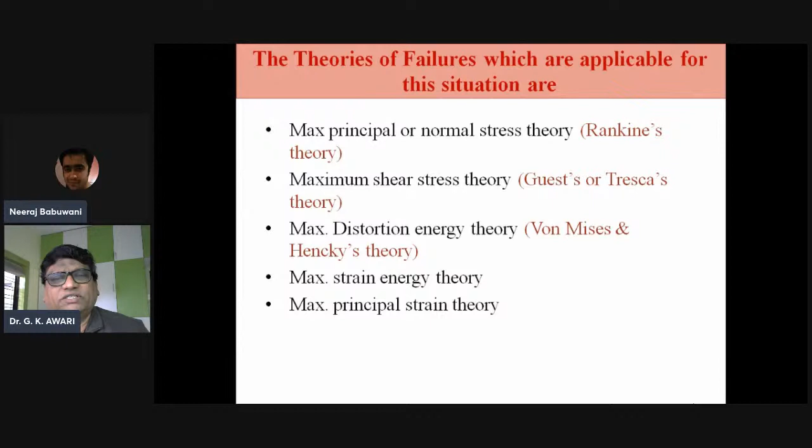Ductile material - you know there are properties like ductility, the ductile material and the brittle material, and you are already aware of the definitions of ductility, ductile material and brittle material. Ductile materials usually fail by yielding, and hence the limiting strength is the yield strength of the material as determined from the simple tension test, which is assumed the same in compression.

This means ductile materials usually fail by yielding and their limiting strength is nothing but the yield strength of the material, calculated by the simple tension test and assumed to be the same in compression. For brittle material, the limiting strength is the ultimate tensile strength in tension or compression. So the difference is: in ductile material, the yield strength is the limiting strength, while in brittle material, the ultimate tensile strength in tension or compression is the limiting value.

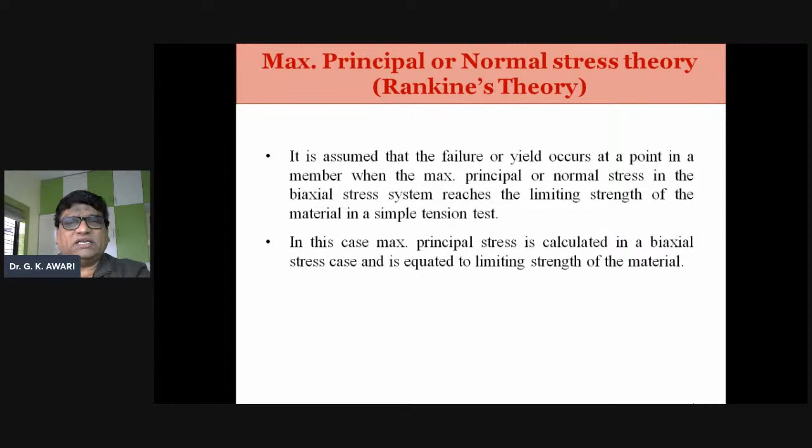Then the maximum principal stress theory, or the normal stress theory, that is Rankine's theory. It is assumed that failure or yield occurs at a point in a member when the maximum principal or normal stress in the biaxial stress system reaches the limiting strength of the material in a simple tension test. So the maximum principal stress is calculated in a biaxial stress case and is equated to the limiting strength of the material.

So maximum principal stress, that is sigma 1, is equal to sigma x plus sigma y divided by 2, plus square root of sigma x minus sigma y divided by 2 whole square plus tau square xy.

So look at this figure, the rectangular cross section is being shown. This is sigma x and tau xy, and in the y direction, sigma y. So this is the maximum principal stress.

So maximum principal stress, that is sigma x plus sigma y divided by 2, plus square root of sigma x minus sigma y divided by 2 whole square plus tau square xy. And minimum principal stress, that is sigma 2, is equal to sigma x plus sigma y divided by 2, minus square root of sigma x minus sigma y divided by 2 whole square plus tau square xy.

So for ductile material, sigma 1 should not exceed SYT divided by FOS, the factor of safety, in tension. For brittle material, sigma 1 should not exceed SUT divided by FOS in tension. So this theory is basically applicable for brittle materials, which are relatively stronger in shear, and not applicable to ductile materials, which are relatively weak in shear.

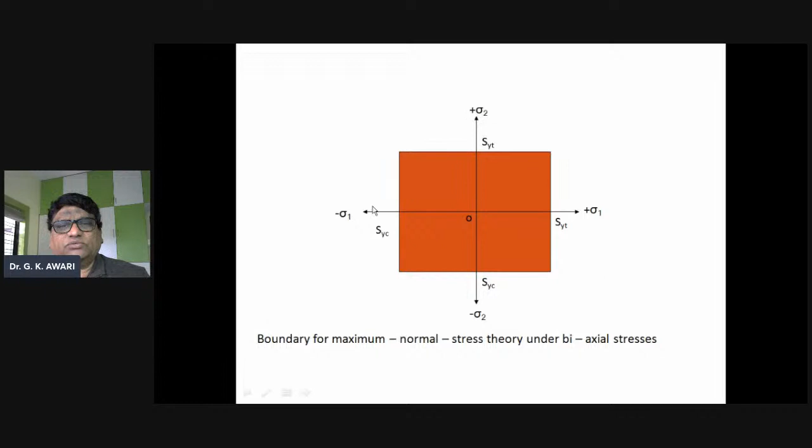The maximum shear stress theory, that is Guest's or Tresca's theory: the failure or yielding is assumed to take place at a point in a member where the maximum shear stress in a biaxial stress system reaches a value equal to the shear strength of the material obtained from a simple tension test.

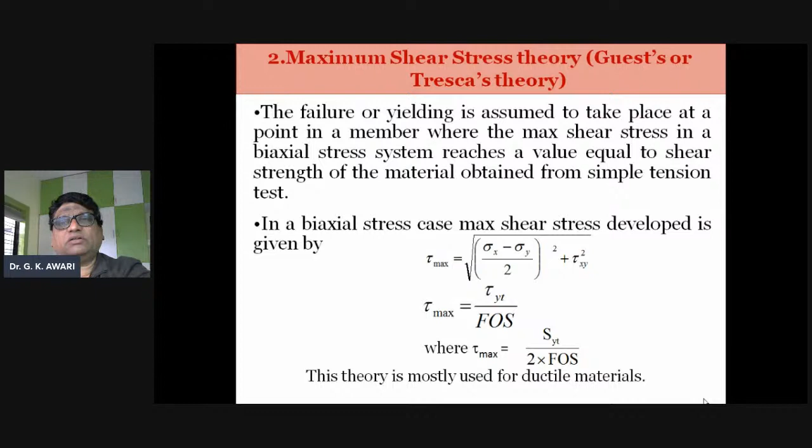In a biaxial stress case, the maximum shear stress developed is given by tau max is equal to square root of sigma x minus sigma y divided by 2 whole square plus tau square xy. Here tau max is equal to tau yt divided by factor of safety, FOS, where tau max is equal to SYT divided by 2 times FOS. So this theory is mostly used for ductile material. Yes, maximum shear stress theory, or Guest or Tresca theory, is used for ductile material.

According to the maximum shear stress theory, tau max is equal to SYT divided by 2, and also tau max is equal to maximum direct stress minus minimum direct stress divided by 2. So assuming sigma 1 is greater than sigma 2, sigma 2 is greater than sigma 3, and sigma 3 is equal to 0. So case 1, that is the first quadrant, sigma 1 and sigma 2 are positive. So tau max is equal to sigma 1 minus sigma 3 divided by 2, that is sigma 1 plus 0 divided by 2, which is equal to sigma 1 divided by 2, equal to SYT divided by 2. That is, sigma 1 is equal to SYT.

Case 4, fourth quadrant, sigma 1 is positive and sigma 2 is negative. Then tau max is equal to sigma 1 minus sigma 2 divided by 2, equal to SYT divided by 2. So second quadrant, that is sigma 1 is negative and sigma 2 is positive, then tau max is equal to sigma 2 minus sigma 1, in bracket, divided by 2. So finally it comes out to be sigma 2 plus sigma 1 divided by 2.

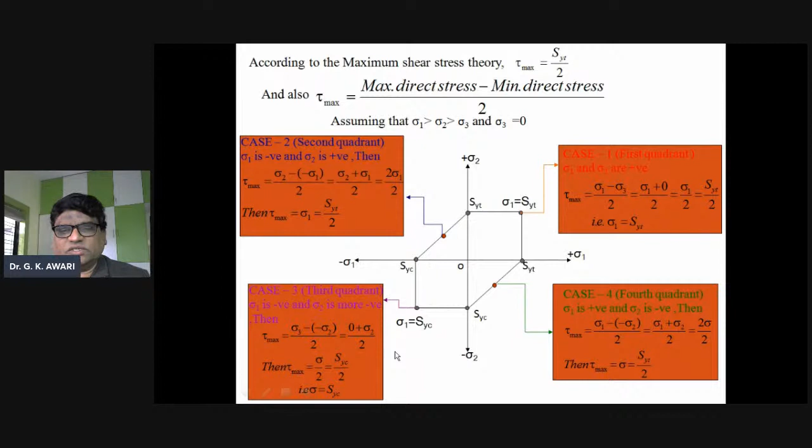So 2 sigma 1 divided by 2, and tau max is equal to sigma 1 is equal to SYT by 2. For case 3, in the third quadrant, sigma 1 is negative and sigma 2 is more negative. Here, tau max is equal to sigma 3 minus minus sigma 2 divided by 2, equal to 0, plus sigma 2 divided by 2. Tau max is equal to sigma by 2, equal to SYC divided by 2, so sigma is equal to SYC. This is the maximum distortion energy theory, also called the von Mises and Hencky's theory.

In this theory, it is assumed that failure or yielding occurs at a point in the member where the distortion strain energy, also called shear strain energy per unit volume in a biaxial stress system, reaches the limiting distortion energy, that is the distortion energy at yield point per unit volume as determined from a simple tension test. So maximum distortion energy is the difference between the total strain energy and the strain energy due to uniform stress. This is the maximum distortion energy theory, von Mises and Hencky's theory.

Look at this one. Here, for an element with triaxial stresses, we have the stress component due to distortion of the element, and stress components due to change of volume: sigma 3, sigma 2, sigma 1, and sigma 3d, sigma 2d, sigma 1d.

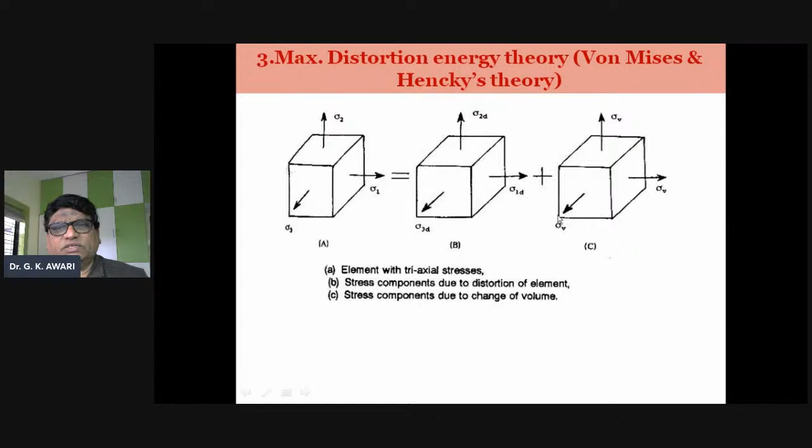Then the maximum distortion energy theory, that is the criteria of failure for the distortion energy theory, is expressed as SYT is equal to square root of 1 by 2 times bracket sigma 1 minus sigma 2 whole square plus sigma 2 minus sigma 3 whole square plus sigma 3 minus sigma 1 whole square.

Considering the factor of safety, SYT divided by FOS is equal to square root of 1 by 2 times sigma 1 minus sigma 2 whole square plus sigma 2 minus sigma 3 whole square plus sigma 3 minus sigma 1 whole square. For biaxial stresses, sigma 3 is equal to 0, so SYT divided by factor of safety is equal to square root of sigma 1 square plus sigma 2 square minus sigma 1 sigma 2. This is the maximum distortion energy theory, the von Mises and Hencky's theory.

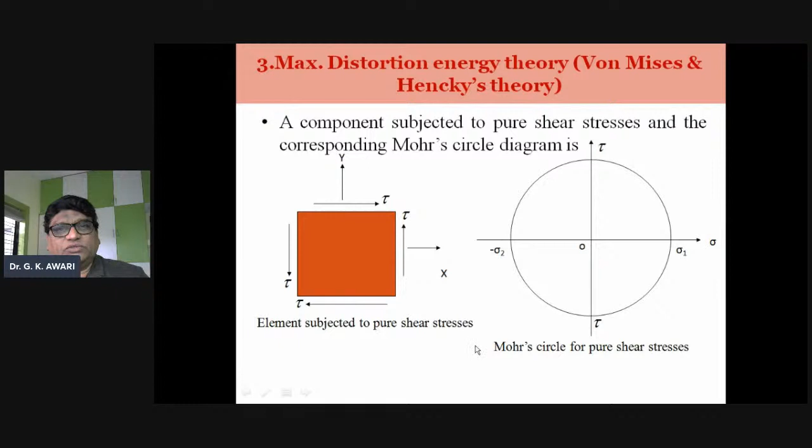A component subjected to pure shear stresses and the corresponding Mohr circle diagram is shown here. This is the Mohr circle diagram for pure shear stress. You can see tau placed here, sigma 1 on the x axis, and minus sigma 2 on the x axis. This is an element subjected to pure shear stresses. From the figure, we can see that sigma 1 is equal to minus sigma 2, which is equal to tau, and sigma 3 is equal to 0.

Substituting the values in the equation, SYT divided by FOS is equal to square root of sigma 1 square plus sigma 2 square minus sigma 1 into sigma 2. So we get SYT is equal to square root of 3 times tau. Replacing tau by SSY, we get SSY is equal to SYT divided by root 3, which is equal to 0.577 SYT.

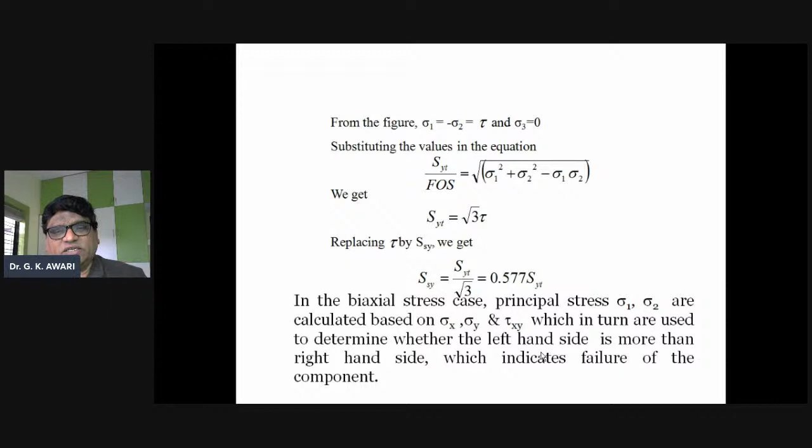In the biaxial stress case, principal stresses sigma 1 and sigma 2 are calculated based on sigma x, sigma y, and tau xy, which in turn are used to determine whether the left hand side is more than the right hand side, which indicates failure of the component. So these are the four cases being presented here.

Case number one: sigma 1 and sigma 2 are both positive and equal to sigma. Then SYT divided by FOS is equal to square root of sigma 1 square plus sigma 2 square minus sigma 1 into sigma 2, where sigma is equal to SYT divided by FOS, the factor of safety.

In the second case, sigma 1 is negative and sigma 2 is positive, equal to sigma. Then SYT divided by FOS comes out to be square root of sigma 1 square plus sigma 2 square minus sigma 1 sigma 2, which is equal to square root of sigma 1 square plus sigma 2 square plus sigma 1 sigma 2. So SYT divided by FOS is equal to square root of 3 sigma square, which is root 3 times sigma. So sigma is equal to 0.577 SYT divided by FOS.

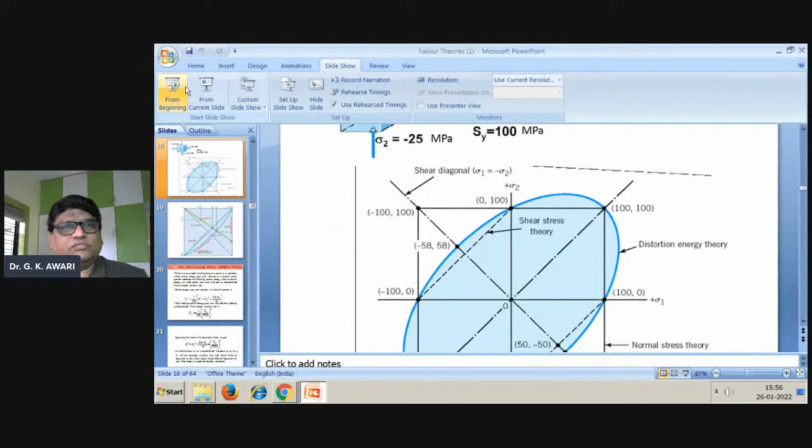So this is nothing but the shear stress theory. This is nothing but the normal stress theory. And the boundary, you can see that shear stress theory is shown in the dotted line. So the load point, load line - this is the load line, this is the shear diagonal, maximum shear stress, maximum distortion energy theory, maximum normal stress theory.

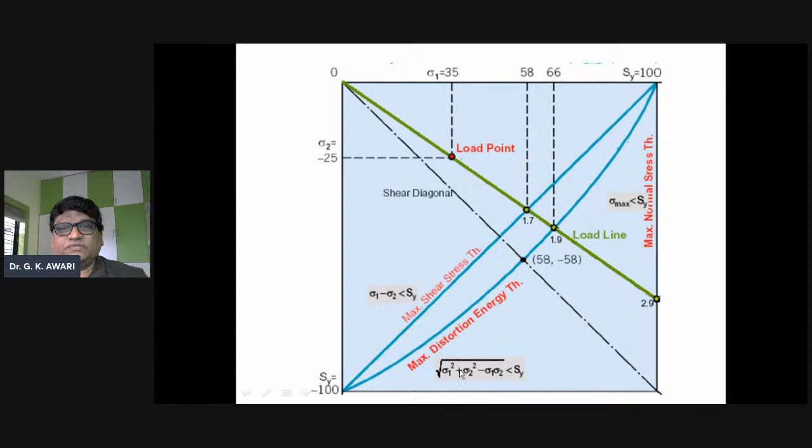So square root of sigma 1 square plus sigma 2 square minus sigma 1 sigma 2, less than or equal to SY. Then maximum strain energy theory, or the Haigh's theory.

So failure is assumed to take place at a point in a member where strain energy per unit volume in a biaxial stress system reaches the limiting strain energy, that is strain energy at yield point per unit volume as compared from a single simple tension test. So strain energy per unit of volume in a biaxial system is basically given by an equation...

u1 is equal to 1 by 2E into bracket sigma 1 square plus sigma 2 square minus 2 sigma 1 sigma 2 divided by m. The limiting strain energy per unit of volume for yielding, determined from the simple tension test, that is u2 is equal to 1 by 2E into bracket SYT divided by FOS whole square. So equating the above two equations, we get sigma 1 square plus sigma 2 square minus 2 times sigma 1 into sigma 2 divided by m is equal to SYT divided by FS whole square.

In the biaxial case, sigma 1 and sigma 2 are calculated based on sigma x, sigma y, and tau xy. It will be checked whether the left hand side of the equation is less than the right hand side of the equation or not. And this theory is used for ductile material.

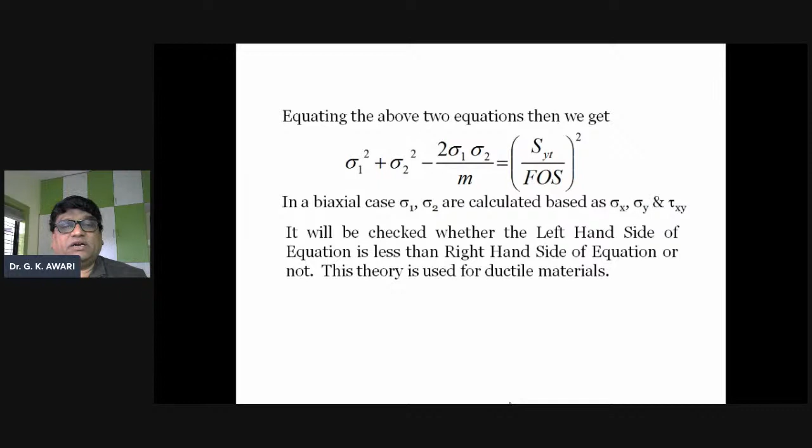Then the fifth topic in these failure theories, that is maximum principal strain theory, or Saint Venant's theory. It is assumed that failure or yielding occurs at a point in a member where the maximum principal normal strain in a biaxial stress exceeds the limiting value of strain at yield point as obtained by the simple tension test.

So in a biaxial stress case, Emax is equal to sigma 1 divided by E minus sigma 2 divided by mE, which is equal to SYT divided by factor of safety into E. One can calculate sigma 1 and sigma 2 given the sigma x, sigma y, and tau xy values, and we need to check whether the material fails or not. So this theory is not used in general as a reliable result, as reliable results could not be obtained in a variety of materials. So maximum principal stress theory, strain theory - that is Saint Venant's theory - may be considered to check whether the material fails or not, but this theory is not reliable.

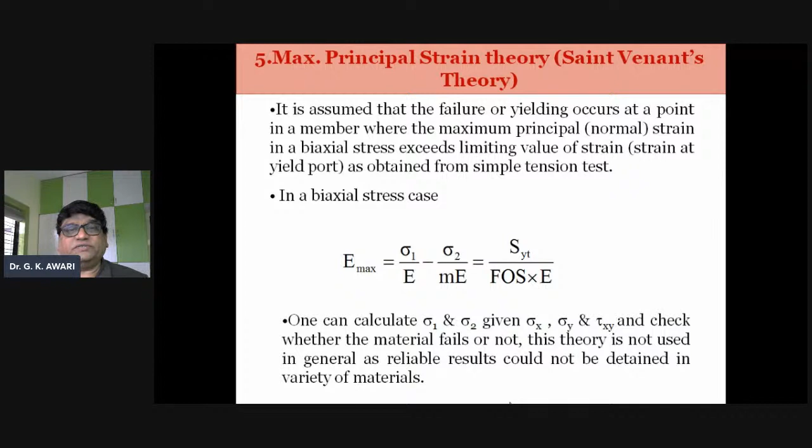Now, an example of these failure theories: the load on a bolt consists of an axial pull of 10 kilonewton together with a transverse shear force of 5 kilonewton. Find the diameter of the bolt required according to the maximum principal stress theory, maximum shear stress theory, maximum principal strain theory, and maximum strain energy theory or maximum distortion energy theory. Permissible tensile stress at the elastic limit is equal to 100 MPa and Poisson's ratio is 0.3.

This example is given where the load on the bolt consists of an axial pull of 10 kilonewton together with a transverse shear force of 5 kilonewton, and we have to find the diameter of the bolt required. What should be the diameter according to the maximum principal stress theory, maximum shear stress theory, maximum principal strain theory, maximum strain energy theory, and maximum distortion energy theory? The permissible stress at the elastic limit is equal to 100 MPa and Poisson's ratio is 0.3.

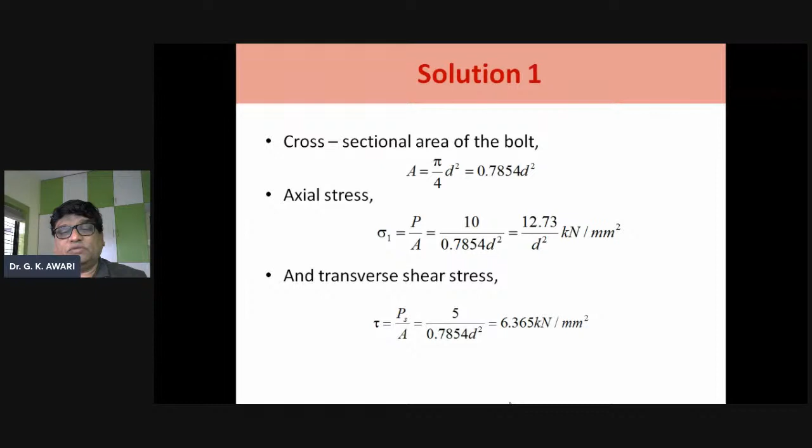The cross-sectional area of the bolt can be calculated as A equals pi by 4 d square, which comes out to be 0.7854 d square. Then axial stress sigma 1 equals P by A, so 10 divided by 0.7854 d square equals 12.73 divided by d square kilonewton per mm square. The transverse shear stress tau equals PS divided by A, equals 5 divided by 0.7854 d square, hence tau equals 6.36 kilonewton per mm square.

According to the maximum principal stress theory, the maximum principal stress sigma 1 equals sigma x plus sigma y divided by 2 plus square root of sigma x minus sigma y divided by 2 whole square plus tau square xy. So sigma 1 equals 12.73 divided by d square plus square root of 12.73 divided by 2d square whole square plus 6.365 divided by d square whole square, and finally sigma 1 equals 15365 divided by d square newton per mm square.

According to the maximum principal stress theory, SYT equals sigma 1. So 100 equals 15365 divided by d square, and the diameter of the bolt comes out to be 12.4 mm.

Then according to the maximum shear stress theory, the equation proposed is tau max equals square root of sigma x minus sigma y divided by 2 whole square plus tau square xy. So tau max equals 12.73 divided by d square plus 6.365 divided by d square whole square, giving tau max equals 9 divided by d square kilonewton per mm square, equal to 9000 divided by d square newton per mm square.

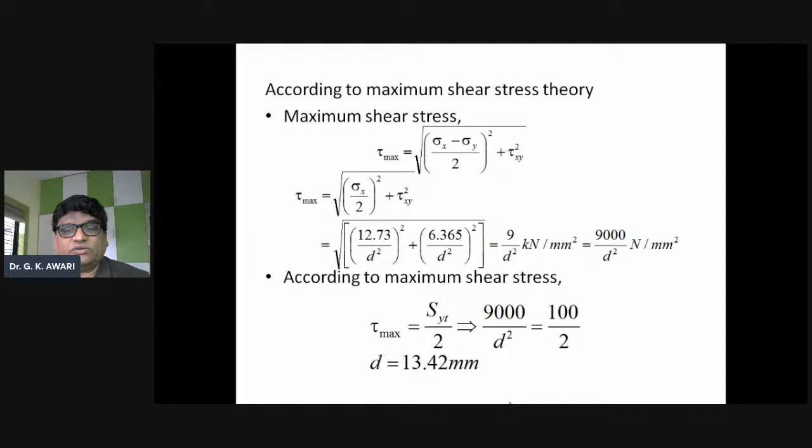According to the maximum shear stress theory, tau max equals SYT divided by 2, so 9000 divided by d square equals 100 divided by 2. So d equals 13.42 mm.

Then according to the maximum principal strain theory, the maximum principal stress is given by sigma 1 equals sigma x plus sigma y divided by 2 plus square root of sigma x minus sigma y divided by 2 whole square plus tau square xy, giving 15365 divided by d square. The other principal stress sigma 2 equals sigma x plus sigma y divided by 2 minus square root of sigma x minus sigma y divided by 2 whole square plus tau square xy.

So sigma 2 is given by sigma x divided by 2 minus square root of sigma x divided by 2 whole square plus tau square xy. It comes out to be 12.73 divided by d square minus square root of 12.73 divided by 2d square whole square plus 6.365 divided by d square whole square, so sigma 2 equals minus 2635 divided by d square newton per mm square.

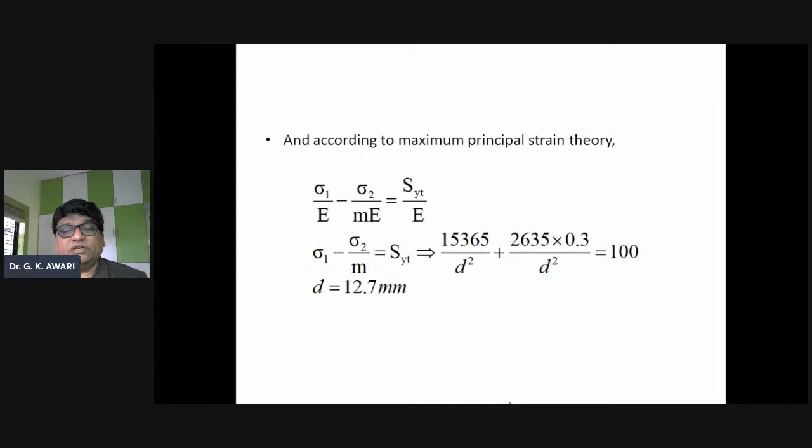According to the maximum principal strain theory, sigma 1 minus sigma 2 divided by m equals SYT divided by E, where sigma 1 minus sigma 2 by m equals SYT, equal to 15365 divided by d square plus 2635 into 0.3 divided by d square equals 100. So the diameter comes out to be 12.7 mm.

Then according to the maximum strain energy theory, sigma 1 square plus sigma 2 square minus 2 sigma 1 sigma 2 divided by m equals syt square. So these are the equations used to find the diameter, which is 12.78 mm.

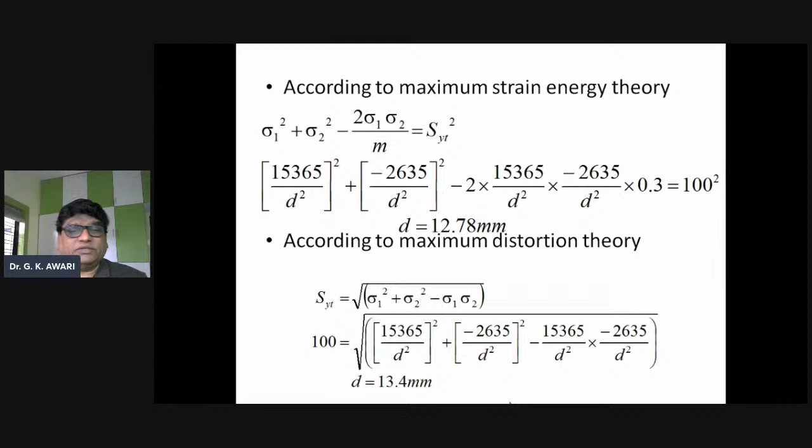Average the value according to the maximum distortion theory. So SYT is equal to square root of sigma 1 square plus sigma 2 square minus sigma 1 sigma 2. Keeping the value of 100 as SYT, 100 is equal to square root of 15365 divided by d square, minus 2635 divided by d square, minus 15365 divided by d square minus 1, minus 2635 divided by d square. So d is equal to 13.4 mm.

So now we will see the fatigue strength and analysis.

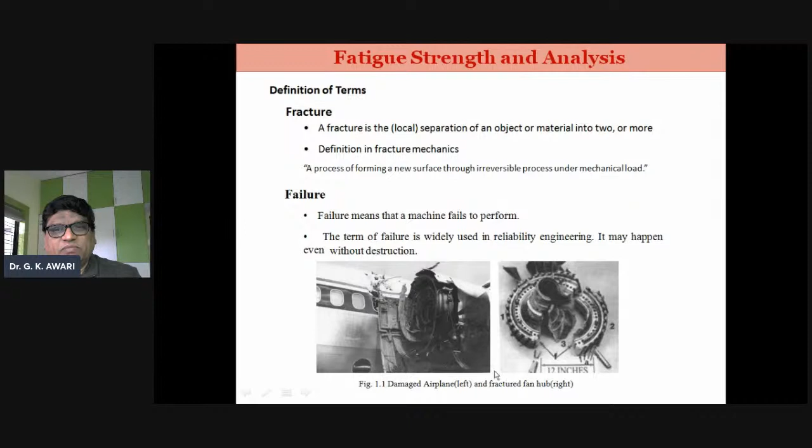Then classification of fracture type: ductile fracture, that is extensive plastic deformation takes place before the fracture. Relatively slow and stable crack propagation, in that cracks are in equilibrium at each point. Propagation stops when a load is removed, and an extra load must be applied for further crack propagation.

So in a pipe: ductile fracture, left, one piece and a large deformation; brittle fracture, right, many pieces from small deformation. Crack propagation is stable, and the cracks are in equilibrium at each point. Propagation stops when a load is removed, and an extra load must be applied for further crack propagation.

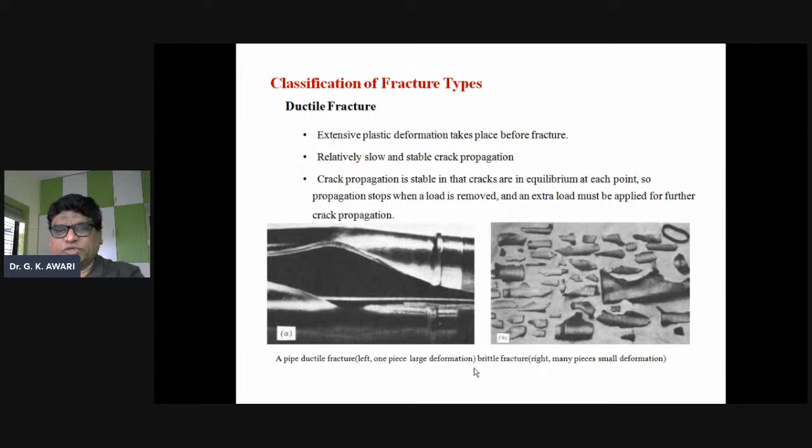Definition in ASTM, American Society for Testing and Material: it is the process of progressively localized permanent structural change occurring in a material subjected to conditions that produce fluctuating stresses and strains at some point or points, and which may culminate in cracks and complete fracture at a sufficient number of fluctuations. So fatigue fracture is the destruction as a result of repeated loading and unloading.

Fatigue fracture generalization: a material receives external or internal repeated loading, cyclic loading, changes in local organization due to the repeated load eventually lead to cracks or fracture process.

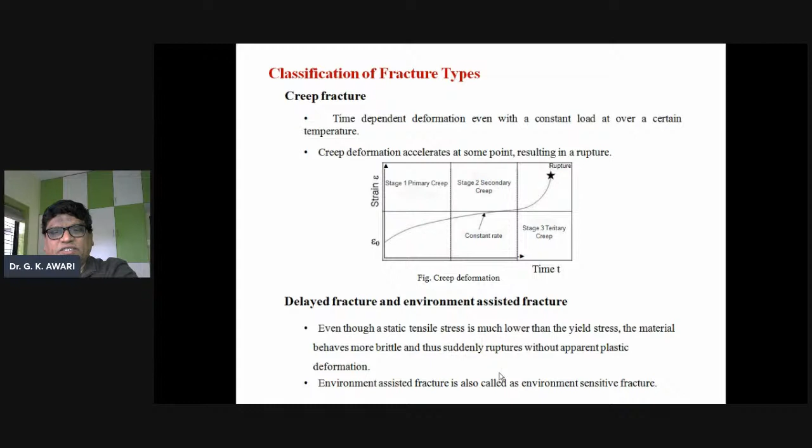Then the fracture types and basically the material strength.

What do you mean by the strength of material? Strength of the material is considered in two cases: with and without flaws or cracks. Basic strength is normally without flaws.

Fatigue strength is very important in terms of the strength of material, and fatigue strength is one of the important parameters in mechanical design.

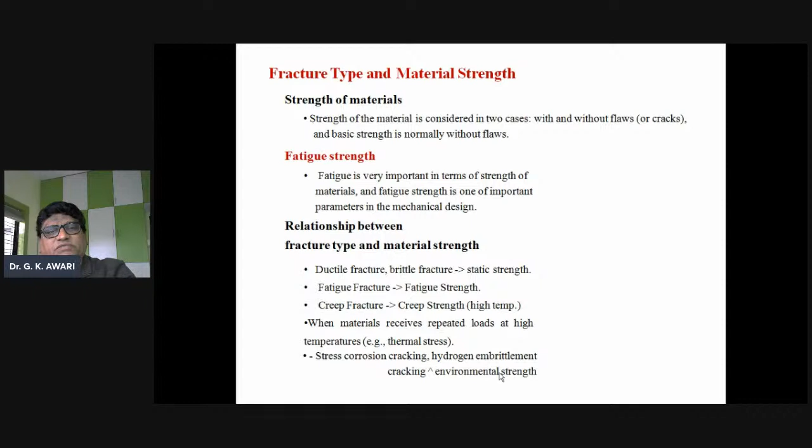Relationship between the fracture type and material strength: ductile fracture, brittle fracture from static strength; fatigue fracture from fatigue strength; creep fracture from creep strength or high temperature, when material receives repeated loads at high temperature, for example thermal stresses; and stress corrosion cracking, hydrogen embrittlement cracking, and environmental strength. This is the relationship between fracture type and material strength.

Characteristics of fatigue fracture: cyclic loading. Fatigue occurs as a result of repeated loading and unloading. All machines and structures get cyclic loading in nature, so most fractures result from fatigue only. Although cyclic stress range is smaller than static fracture stress or yield stress, fatigue fracture occurs.

Fatigue limit or endurance limit are expressions used to describe a property of material: the amplitude of cyclic stress that can be applied to the material without causing fatigue failure.

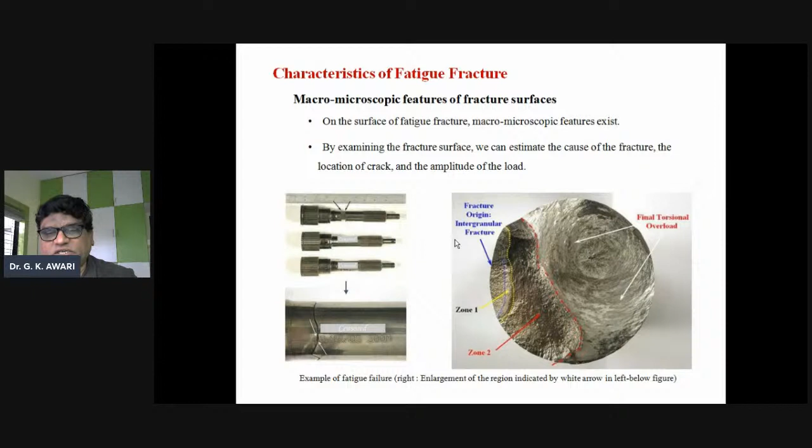SN diagram: you can see here the number of stress cycles and fatigue strength, that is KPSI. Low cycle here, and high cycle here - finite life, infinite life.

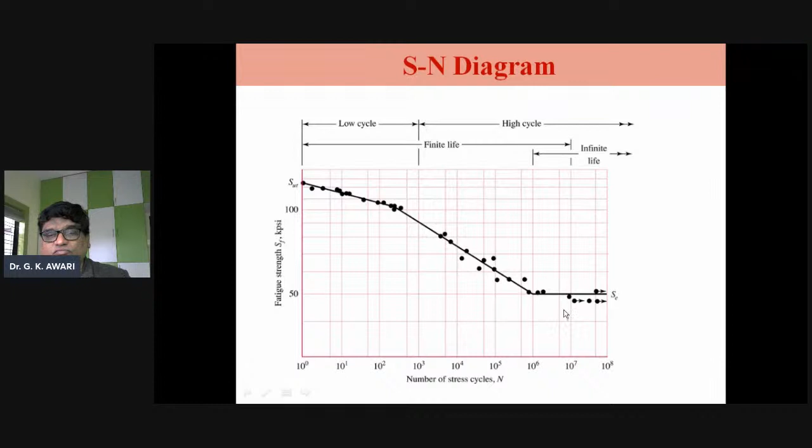Stress levels below Se predict infinite life. 10 to the power of 3, 10 to the 2, 10 to the power of 6 cycles is finite cycle. Below 10 to the power of 3 is low cycle, that is quasi-static, and yielding usually occurs before fatigue. This is the SN diagram for steel.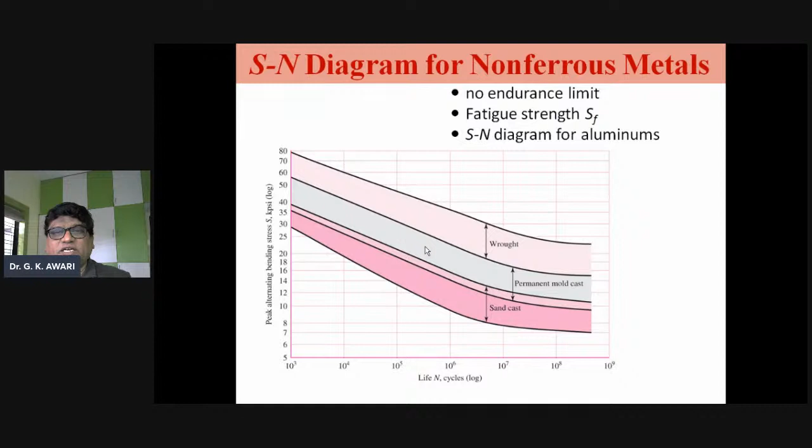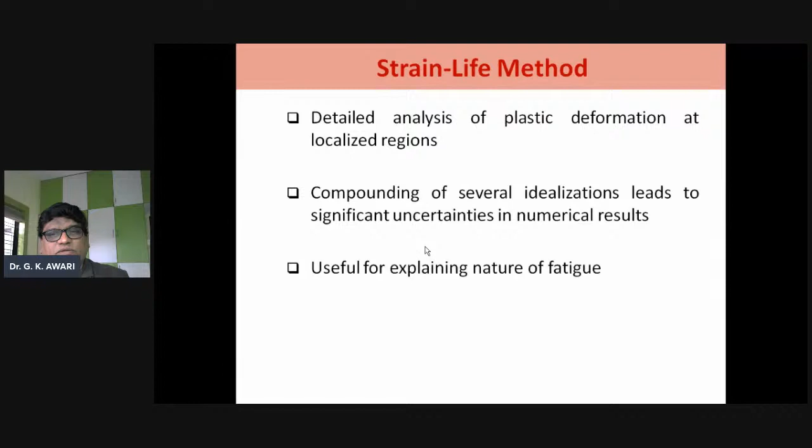The detailed analysis of plastic deformation at a localized region is the strain-life method. Compounding of several idealizations leads to significant uncertainties in numerical results, but it's useful for explaining the nature of fatigue. Then the strain-life method: fatigue failure begins at a local discontinuity.

It begins at the local discontinuity. When stress at the discontinuity exceeds the elastic limit, plastic strain occurs. The cyclic plastic strain can change the elastic limit, leading to fatigue.

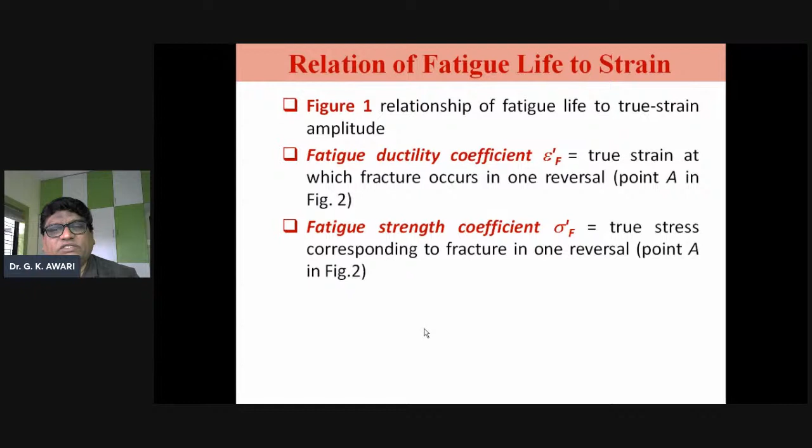Relationship of fatigue life to strain: figure one shows the relationship of fatigue life to the true strain amplitude. Fatigue ductility coefficient is the true strain at which fracture occurs in one reversal, point A in figure 2. Fatigue strength coefficient is the true stress corresponding to fracture in one reversal, point A in figure 2.

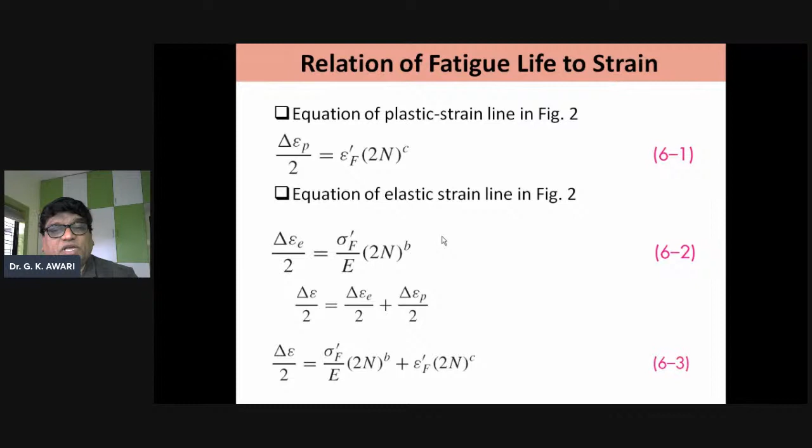The relationship of fatigue life to strain: equation of the plastic strain line is delta epsilon P divided by 2 equals epsilon F prime times 2N to the power c. Equation of the elastic strain line is delta epsilon E divided by 2 equals sigma F prime divided by E times 2N to the power b, plus epsilon F prime times 2N to the power c.

The relationship of fatigue life to strain: delta epsilon E divided by 2 equals sigma F prime divided by E times 2N to the power b.

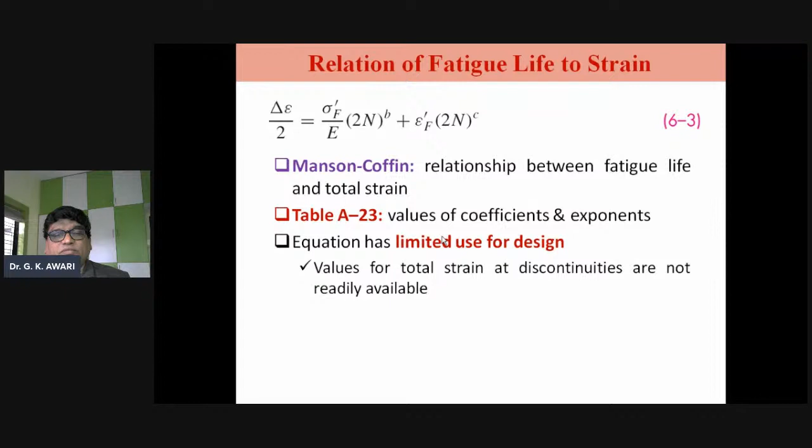The Manson-Coffin relationship relates fatigue life to total strain. Table A-23 gives values of coefficient and exponent, but the equation has limited use for design since values of total strain at discontinuities are not readily available.

For the endurance limit, we can see the plot for three materials: carbon steels, alloy steels, and wrought iron, plotted with respect to tensile strength SUT against the endurance limit.

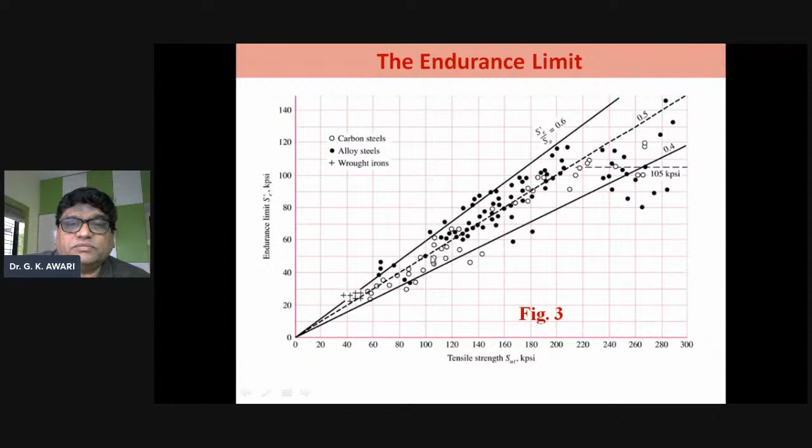A simplified estimate of endurance limit for steels, for the rotating beam specification specimen, is S'e equals 0.5 SUT, which gives the endurance limit.

The simplified relationship is: SUT should be lesser than or equal to 200 kpsi (1400 megapascal); for SUT greater than 200 kpsi and 1400 MPa, S'e equals 100 kpsi, and 700 megapascal for SUT greater than 1400 MPa.

Fatigue strength for design requires an approximation of the idealized SN diagram. To estimate fatigue strength at 10 to the power of 3 cycles, start with equation 6.2.

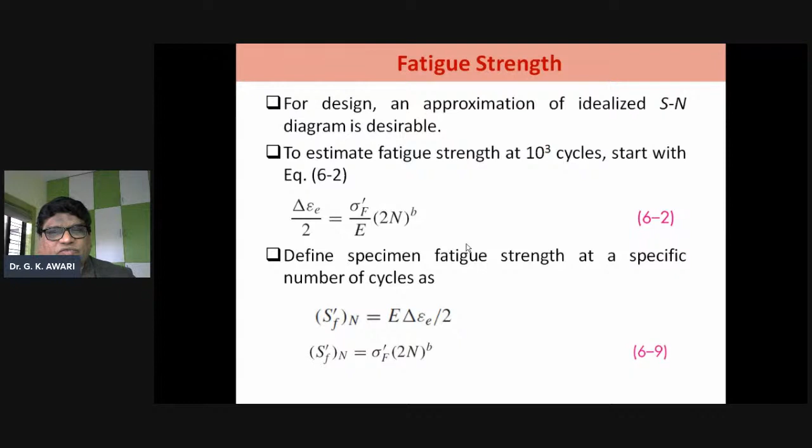At 10 to the power of 3 cycles, F is equal to a fraction of SUT. So the fraction of SUT is equal to SF at 10 to the power of 3.

Here sigma F is equal to SUT plus 50 kpsi, or sigma F is equal to SUT plus 345 MPa.

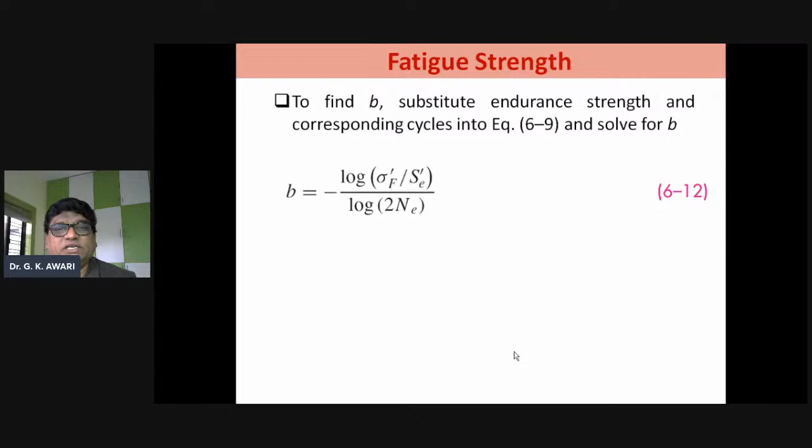To find B, substitute the endurance strength and corresponding cycles into equation 6.9 and solve for B: B is equal to minus log of sigma F divided by SE, divided by log of 2n.

So SFN is equal to sigma F times 2n to the power of B. Then substitute equation 6.11 and 6.12 into equations 6.9 and 6.10, shown here, to obtain the expression for SF and F.

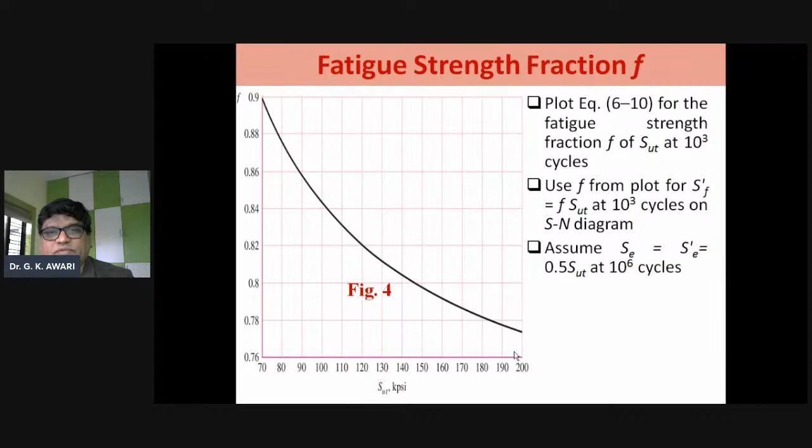So use F from the plot, that is, SF equals F of SUT at 10 to the power of 3 cycles on the SN diagram, and assume SE equals 0.5 SUT at 10 to the power of 6 cycles.

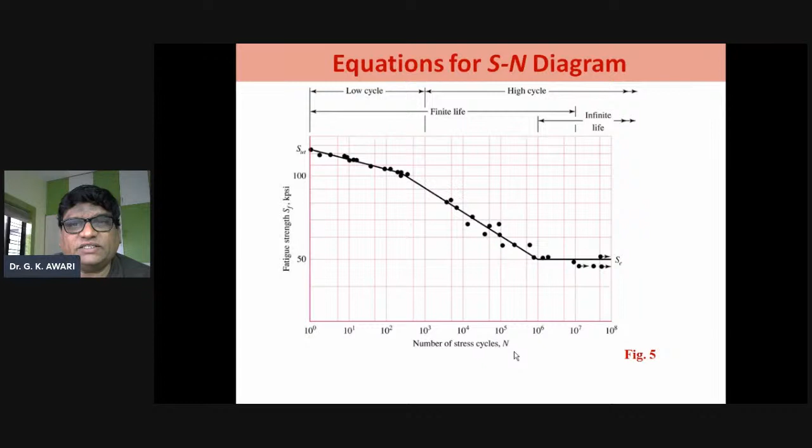So equations for the SN diagram covering fatigue strength versus number of cycles, low cycle, high cycle, finite life, and infinite life are given. Write equations for the SN line starting from 10 to the power of 3.

So for the equations of the SN diagram, write the equation for the SN line from 10 to the power of 3 to 10 to the power of 6 cycles.

Using two known points: at n equals 10 to the power of 3 cycles, SF equals F of SUT, and at n equals 10 to the power of 6 cycles, SF equals SE.

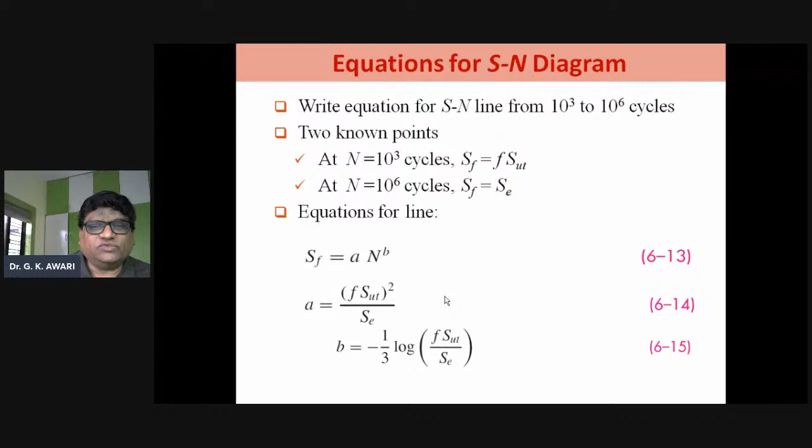The equation for the line is SF equals a times n to the power of b, where a equals F of SUT squared divided by SE, and b equals minus one-third log of F SUT divided by SE.

If a completely reversed stress sigma reversed is given, setting SF equal to sigma reversed and solving for n gives n equals sigma reversed divided by A, raised to the power of 1 by B.

So the typical SN diagram is only applicable for completely reversed stresses. For other stress states, a completely reversed stress with the same life expectancy must be used on the SN diagram.

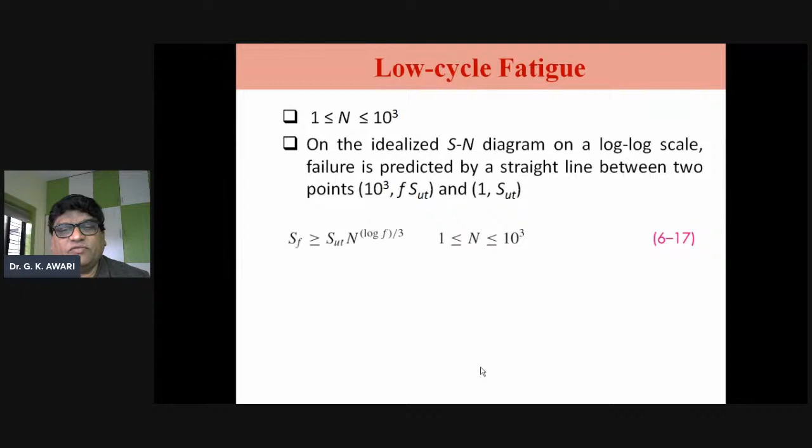Low cycle fatigue occurs when n is greater than 1 and less than 10 to the power of 3. On the idealized diagram using a log scale, failure is predicted by a straight line between two points: 10 to the power of 3 comma F of SUT, and 1 comma SUT. So SF equals SUT times n to the power of log of F divided by 3, where n lies between 1 and 10 to the power of 3.

So, given a 1050 HR steel, estimate the rotating beam endurance limit at 10 to the power of 6 cycles.

The endurance strength of a polished rotating beam specimen corresponding to 10 to the power of 4 cycles to failure, and the expected life of a polished rotating beam specimen under a completely reversed stress of 55 kpsi.

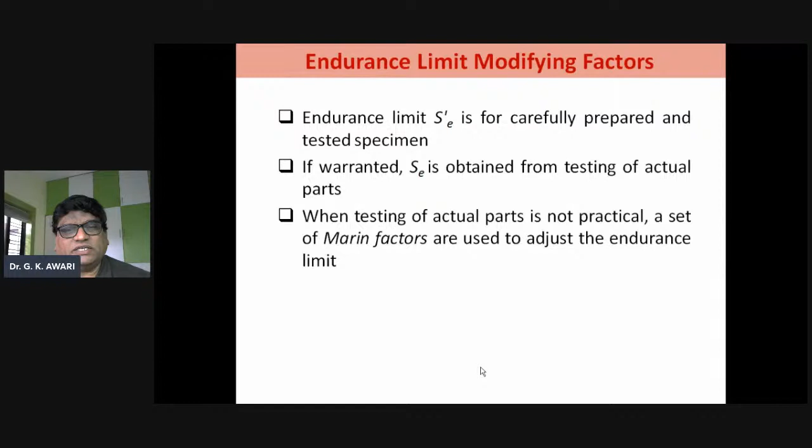So the endurance limit SE is for a carefully prepared and tested specimen. If warranted, SE is obtained from testing of the actual part. When testing of the actual part is not practicable, a set of Marin factors are used to adjust the endurance limit.

So these are some of the GATE questions based on the theories of failure. Match the correct pairs from the list. What is given: Hooke's law, Saint Venant's law, Kepler's law, Tresca's criteria, Coulomb's law, Griffith's law.

Planetary motion corresponds to Kepler's law, not Saint Venant's law, which is the maximum principal strain theory. Hooke's law is related to elasticity, Kepler's law is related to planetary motion, and Tresca's criteria is related to fracture.

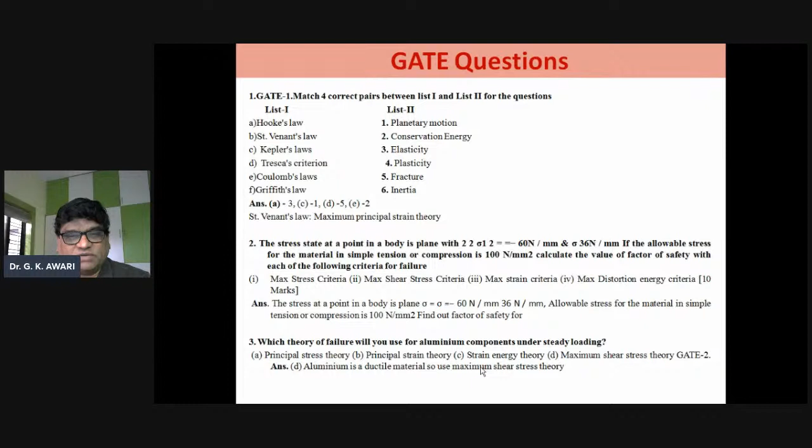Which theory of failure will you use for aluminum components under steady loading? Options are maximum principal stress theory, maximum principal strain theory, strain energy theory, or maximum shear stress theory. Since aluminum is a ductile material, we use the maximum shear stress theory.

Similarly, which of the following is the most conservative fatigue failure criteria? Soderberg criteria, modified Goodman criteria, ASME elliptic, or Gerber criteria? So Soderberg criteria is the most conservative fatigue fracture criteria.

The fatigue strength of a rod subjected to axial load is less than that of a rotating beam of the same dimensions subjected to a steady lateral force, because axial stiffness is less than the bending stiffness in the absence of centrifugal effects. What is the correct option? The number of discontinuities vulnerable to fatigue are more in the rod.

The process of shot peening increases the fatigue life of steel springs mainly because it results in surface hardening, increased stiffness, or metal changes? Actually, shot peening increases the fatigue life of steel springs mainly because it results in residual compression at the surface.

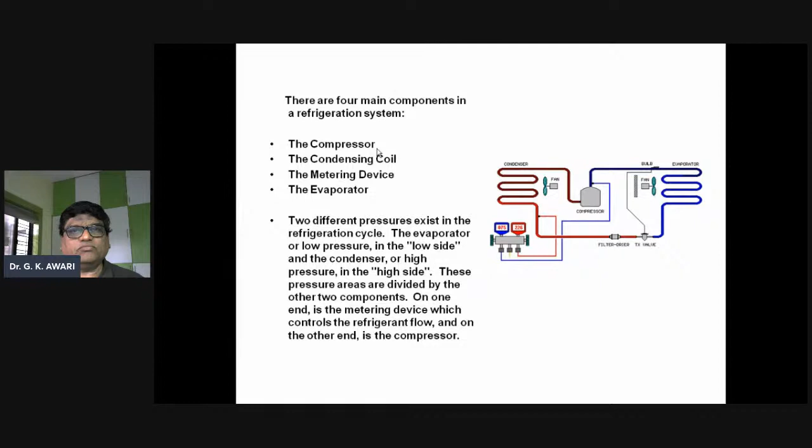Saturation temperature is defined as the temperature of a liquid, vapor, or solid, where if any heat is added or removed, a change of state takes place. This change of state transfers a large amount of energy if saturation pressure materials are sensitive to additions or removal of heat.

Water is an example of a low saturation property material; it can transfer a large amount of heat. Refrigerants use the same principle as ice. For any given pressure, refrigerant has a saturation temperature. If the pressure is low, the saturation temperature is low. If the pressure is high, the saturation temperature is also high.

Latent heat is the heat required to change a liquid into a gas, or the heat that can be removed from the gas. Latent heat must be removed from the gas to condense it into a liquid without any change in temperature. Heat is a form of energy that is transferred from one object to another by a difference in temperature.

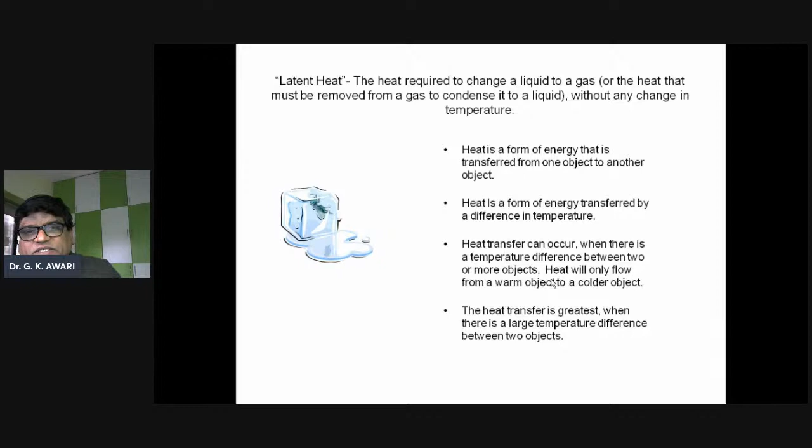Heat transfer can occur when there is a temperature difference between two or more objects. Heat will only flow from a warm object to a colder object. The heat transfer is greatest when there is a large temperature difference between the two objects.

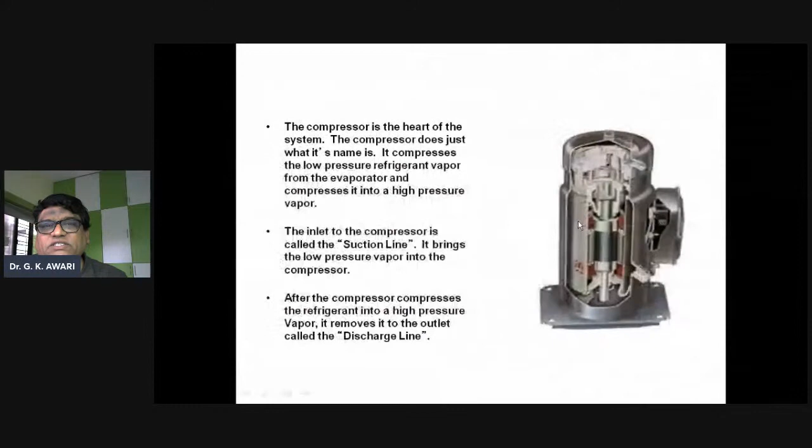There are four main components of the vapor compression cycle: the compressor, the condensing coil, the metering device, and the evaporator. Two different pressures exist in the refrigeration cycle: the evaporator or low pressure on the low side, and the condenser or high pressure on the high side.

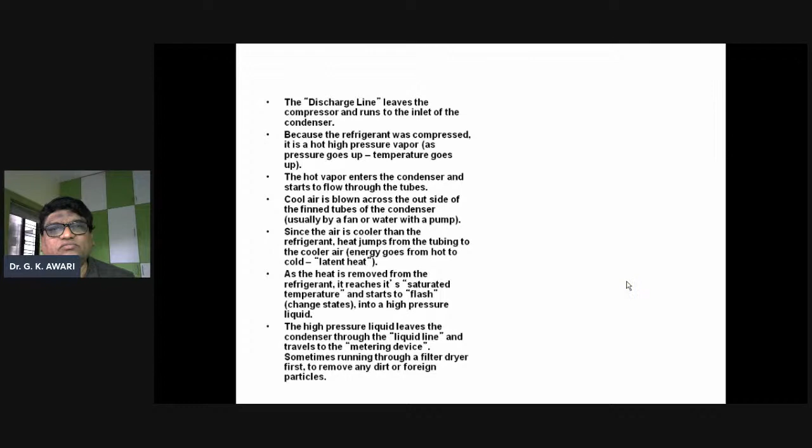The compressor is the heart of the system. The compressor does just what its name implies: it compresses the low pressure refrigerant vapor from the evaporator and compresses it into a high pressure vapor. This is the function of the compressor.

The inlet to the compressor is called the suction line. It brings the low pressure vapor into the compressor, and after the compressor compresses the refrigerant into high pressure vapor, it removes it to the outlet called the discharge line. The discharge line leaves the compressor and runs to the inlet of the condenser. This is the expansion valve, compressor, evaporator, and condenser.

Because the refrigerant was compressed, it is a high pressure vapor. As pressure goes up, temperature goes up. The hot vapor enters the condenser and starts to flow through the tube. Cool air is blown across the side of the fin tubes of a condenser, usually by a fan or water with a pump.

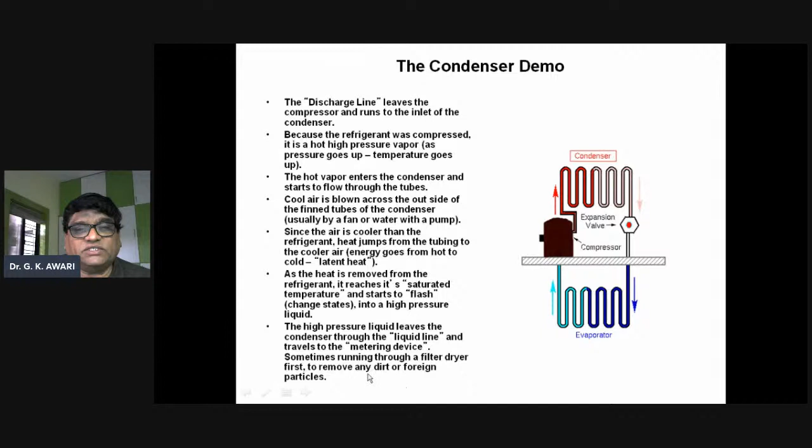As the latent heat is removed from the refrigerant, it reaches its saturated temperature and starts to flash, meaning it changes states into a high pressure liquid. The high pressure liquid leaves the condenser through the liquid line and travels to the metering device, sometimes running through a filter dryer first to remove any dirt or foreign particles.

Metering devices regulate how much liquid refrigerant enters the evaporator. It regulates the flow of the liquid refrigerant entering into the evaporator. Commonly used metering devices are small thin copper tubes, also called cap tubes, or thermally controlled diaphragm valves called TXVs, thermal expansion valves, and single opening orifices.

The metering device tries to maintain a preset temperature difference, or superheat, between the inlet and outlet openings of the evaporator. As the metering device regulates the amount of refrigerant going into the evaporator, the device lets small amounts of refrigerant out into the line and loses the high pressure behind it.

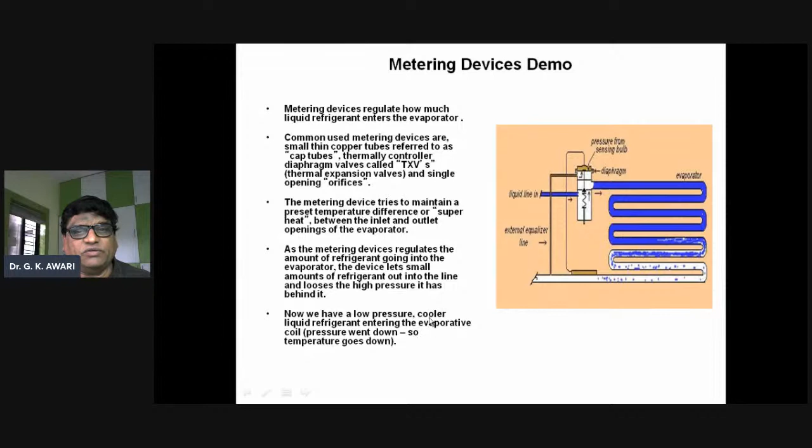Now we have a low pressure, cooler liquid refrigerant entering the evaporator coil. So pressure went down, so the temperature also goes down.

Now the thermal expansion valve. Look at the thermal expansion valve. It is a very common type of metering device, called a TX valve, or thermostatic expansion valve. This valve has the capability of controlling the refrigerant flow.

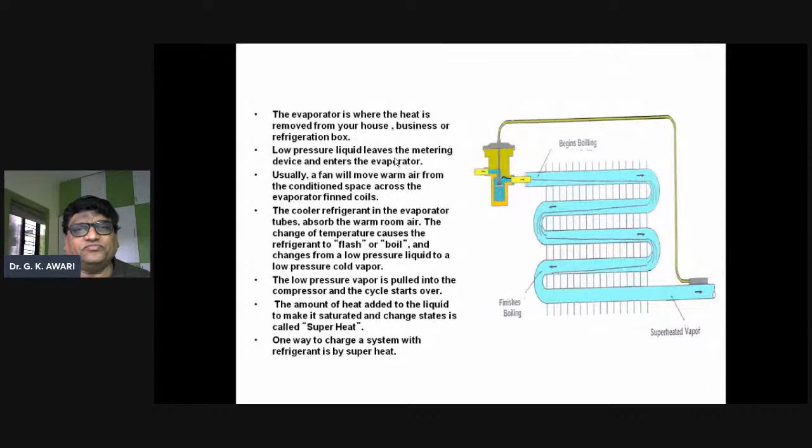If the load on the evaporator changes, the valve can respond to the change and increase or decrease the flow accordingly. The TXV has a sensing bulb attached to the outlet of the evaporator; the bulb senses the suction line temperature and sends a signal to the TXV, allowing it to adjust the flow rate.

This is important because if not all the refrigerant in the evaporator changes state into gas, there could be liquid refrigerant returning to the compressor. This can be fatal to the compressor.

Liquid cannot be compressed, and when a compressor tries to compress a liquid, mechanical failure can happen. The compressor can suffer mechanical damage to the valves and bearings, and this is called liquid slugging.

So normally TXVs, that is thermal expansion valves, are set to maintain 10 degrees of superheat. That means the gas returning to the compressor is at least 10 degrees away from the risk of having any liquid.

In the evaporator demo, you can see this is the part of the evaporator. Here is the superheated vapor, here it begins boiling, and here it finishes boiling. The evaporator is where heat is removed from your house, business, or refrigeration box.

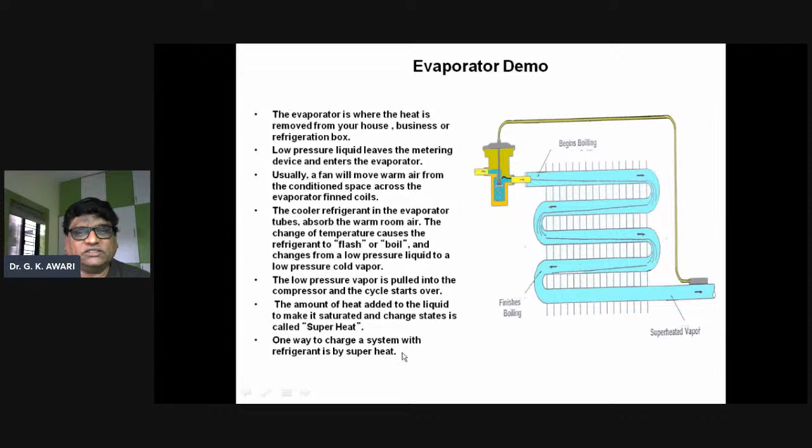The amount of heat added to the liquid to make it saturated and change states is called superheat. One way to charge a system with refrigerant is by superheat.

Now a review of the refrigeration cycle, how the refrigeration cycle works. It starts with the compressor. In the beginning, you have to start the compressor.

Then low pressure vapor refrigerant is compressed and discharged out of the compressor. The refrigerant at this point is at high temperature, high pressure, in the superheated region.

The high pressure refrigerant flows to the condenser through the discharge line. The condenser changes the high temperature vapor into a low temperature, high pressure liquid, and it leaves through the liquid line.

The high pressure refrigerant then flows through a filter dryer to the thermal expansion valve, which meters the correct amount of liquid refrigerant into the evaporator.

As the TXV meters the refrigerant, the high pressure liquid changes to a low pressure, low temperature saturated liquid vapor, and it enters the evaporator and changes to a low pressure dry vapor.

The low pressure dry vapor is then returned to the compressor through the suction line, and then the cycle starts over again. So this is the review of the simple vapor compression system.

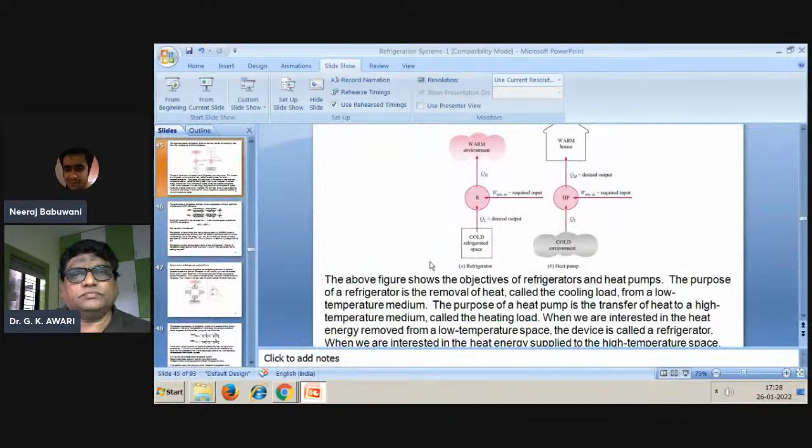The vapor compression refrigeration cycle is a common method.

So the vapor compression refrigeration cycle is a common method for transferring heat from a low temperature to a high temperature. This is the cold or refrigerator space, and by providing the required input, we take out the heat, and this heat is rejected to the warm environment.

This is the refrigerator and the heat pump: the cold environment is there, and the required input is provided so that heat is being pumped from the cold environment and then supplied to the warm house. The above two figures show the objectives of the refrigerator and the heat pump.

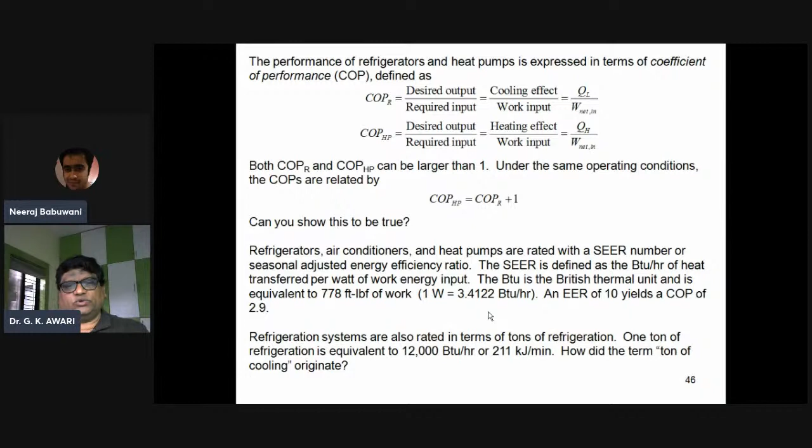How did the term ton of cooling originate? So the reverse Carnot refrigerator and basically the heat pump, in this case if we see here...

Recall that in the Carnot cycle, heat transfer takes place at a constant temperature. So if our interest is in the cooling load, the cycle is called the Carnot refrigerator. If our interest is in the heating load, the cycle is called the Carnot heat pump.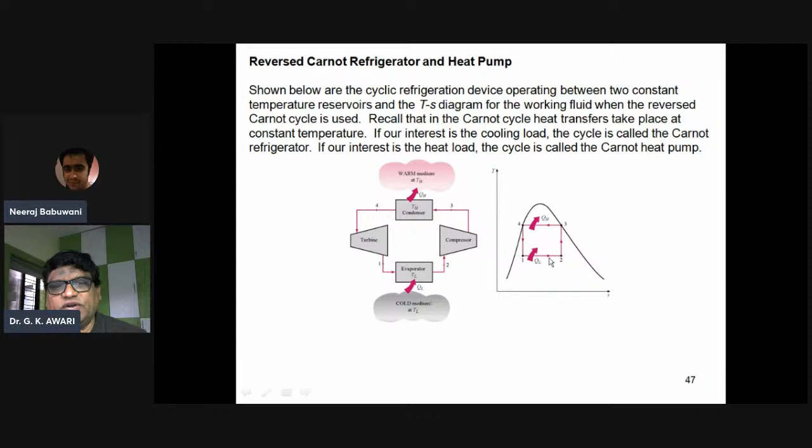is circulated into the evaporator, and again in the evaporator it absorbs heat from the space or substance to be cooled, and then becomes vapor again. These vapors again reach the compressor, and then further compression, condensation, expansion valve or capillary tube, and then evaporator. This process or cycle continues.

The standard of comparison for refrigeration cycles is the reverse Carnot cycle. A refrigerator or heat pump that operates on the reverse Carnot cycle is called a Carnot refrigerator or Carnot heat pump, and their COPs are calculated as COP refrigerator Carnot equals TL divided by TH minus TL, and COP of the heat pump Carnot equals TH divided by TH minus TL.

Notice that a turbine is used for the expansion process between the high and low temperature, while the work interactions for the cycle are not indicated on the figure. The work produced by the turbine helps supply some of the work required by the compressor from external sources.

Why not use the reverse Carnot refrigeration cycle? It is easier to compress vapor only than a liquid vapor mixture, and it is cheaper to have irreversible expansion through an expansion valve. So what problem results from using a turbine instead of an expansion valve?

This brings us to the vapor compression refrigeration cycle. It has four main components: evaporator, compressor, condenser, and the expansion or throttle valve. The most widely used refrigeration cycle is the simple vapor compression refrigeration cycle.

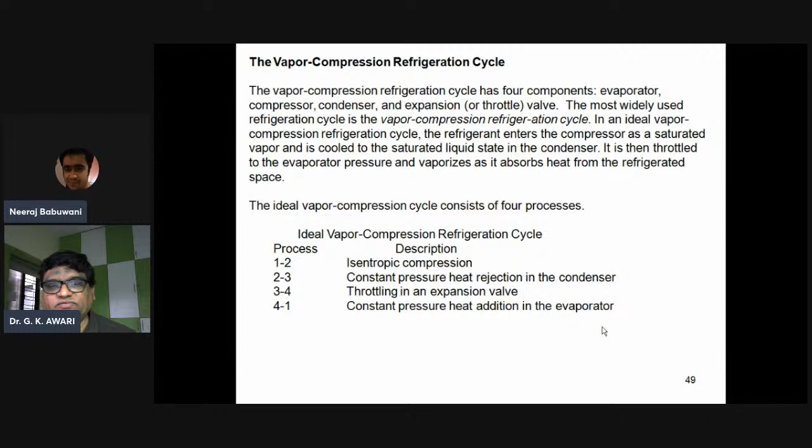This is the PH diagram, another convenient diagram often used to illustrate the refrigeration cycle. Looking at the pressure enthalpy chart here, you can see the working cycle shown: evaporator, compressor, condenser, expansion valve. This represents the cold refrigerator space, and this is the heat rejection to the warm environment.

So 1 to 2 is the compression carried out in the compressor. Then 2 to 3 is the condensation, where basically the vapors get converted into liquid from the saturation line.

Then in 3 to 4, there is a pressure drop of the liquid refrigerant, and then the liquid refrigerant enters the evaporator. In the evaporator again, heat is extracted from the substance or space to be cooled, and then it goes to the second cycle, that is the compressor.

In the temperature entropy diagram also you can see that if this is point 1, then point 2 is shown in the superheated region. This is the saturation line, so this point is the superheated line. And then again the condensation.

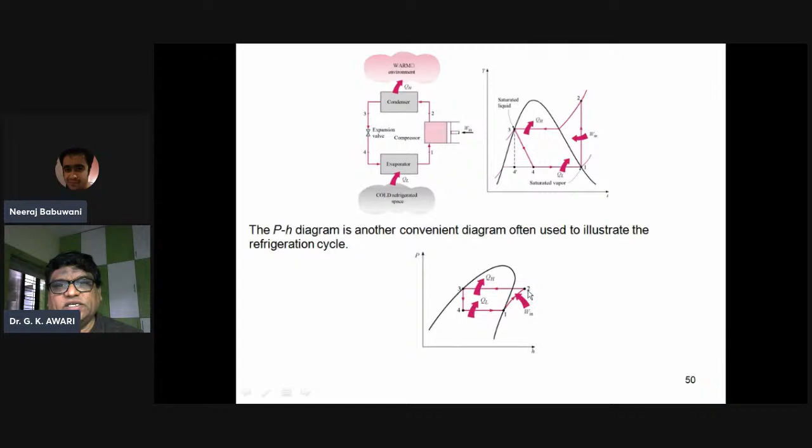The COP of a refrigerator equals QL divided by W net in, which is H1 minus H4 divided by H2 minus H1, referring back to the pressure-enthalpy chart. H1 minus H4 is the heat absorbed, the refrigerating effect, while H2 minus H1 is the compressor work provided. So COP of the refrigerator equals H1 minus H4 divided by H2 minus H1, and COP of the heat pump is QH divided by W net, which is H2 minus H3 divided by H2 minus H1.

Taking an example for refrigerant 134A as the working fluid in an ideal compression refrigeration cycle. The refrigerant leaves the evaporator at minus 20 degrees centigrade and has a condenser pressure of 0.9 megapascal. The mass flow rate is 3 kg per minute. We need to find the COP of the refrigerator, the COP with the Carnot cycle for the same, and T max and T minimum, and the tons of refrigeration. Using the refrigerant 134A tables from the chart, we take the value H1 equal to 238.41 kilojoule per kg.

Entropy at this point is 0.9456 kilojoule per kg Kelvin, at the compressor exit and then the condenser exit. So H3 is equal to 101.61 kilojoule per kg, and at the throttle exit T4 equals T1 equals minus 20 degree centigrade, with H4 equal to H3.

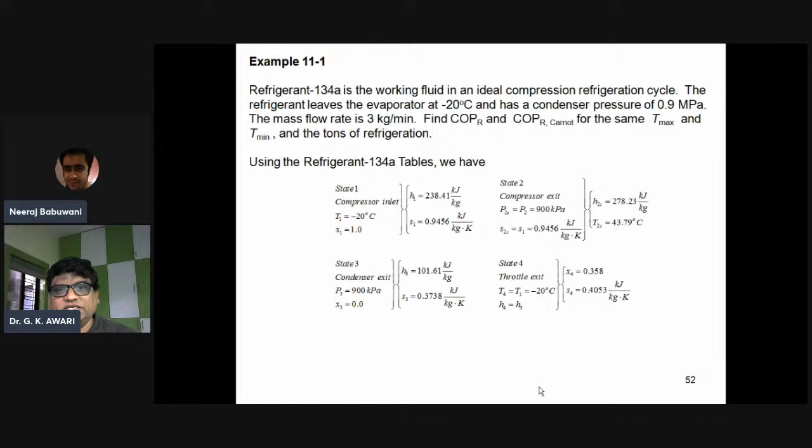So COP of a refrigerator is nothing but QL divided by W net in. Putting in the values, we get that COP of the refrigerator is 3.44.

The tons of refrigeration, often called the cooling load or refrigerating effect: QL is equal to M into H1 minus H4. So 3 kg per minute into 238.41 minus 101.61, which comes out to be 1.94 tons.

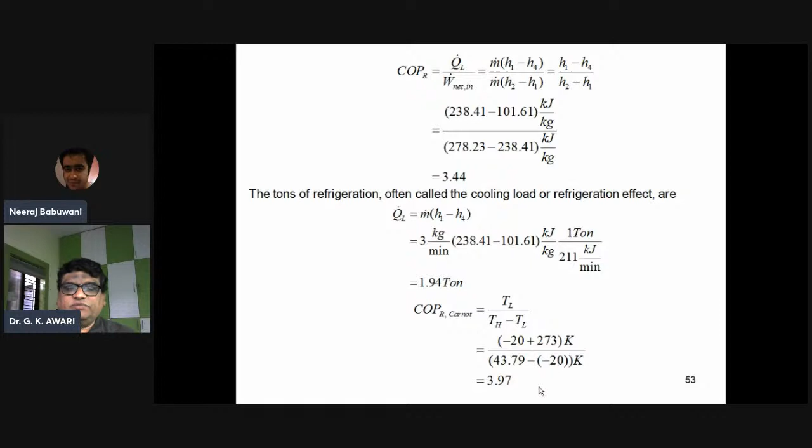The COP of the refrigerator operating on the Carnot cycle is TL divided by TH minus TL. So minus 20 plus 273 Kelvin divided by 43.79 minus of minus 20, giving 3.97.

Another measure of the effectiveness of the refrigeration cycle is how much input power to the compressor, in horsepower, is required for each ton of cooling. The unit conversion is 4.715 HP per ton of cooling. So W net divided by QL equals 4.715 divided by COP of the refrigerator, which comes out to be 1.37 HP per ton.

Now look at the actual vapor compression refrigeration cycle. What we have studied till now is basically the theoretical vapor compression cycle. The practical or actual vapor compression cycle will differ, and you can see this point moves from the superheated region to subcooling here.

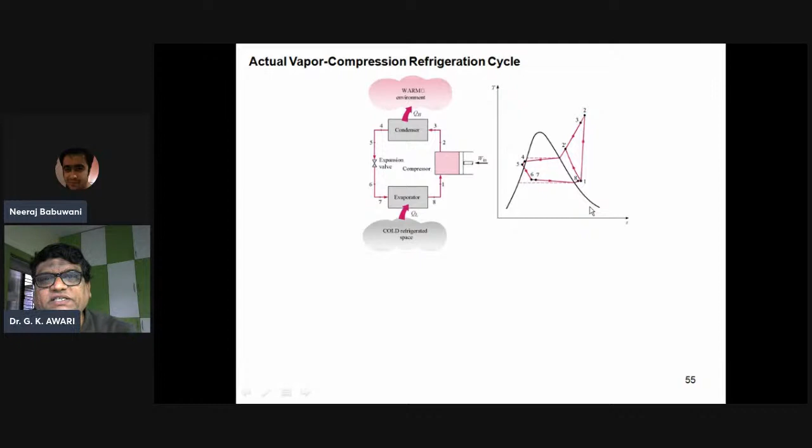Another kind of refrigeration cycle is the cascade refrigeration system. Let me take a review of whether it is going on.

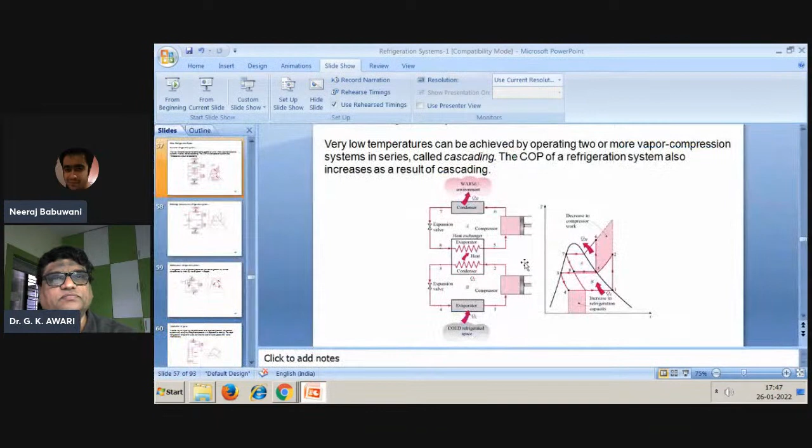Another refrigeration cycle is the cascade refrigeration system. Very low temperatures can be achieved by operating two or more vapor compression systems in series, which is called cascading, and the COP of the refrigeration system also increases as a result. In the cascade system, there is an evaporator, compressor, condenser, expansion valve, and heat is rejected in the condenser, followed by another evaporator, expansion valve, condenser, and evaporator again. This is like one cycle shown in the upper part of the diagram, and the first cycle shown in the lower part of the diagram.

This is the evaporator, and it increases the refrigeration capacity. In the cascade refrigeration system, the refrigeration capacity is increased. Here H1 minus this point would have been there originally, but now it becomes H1 minus H4, which means this additional refrigeration capacity is what we gain with the cascade refrigeration system.

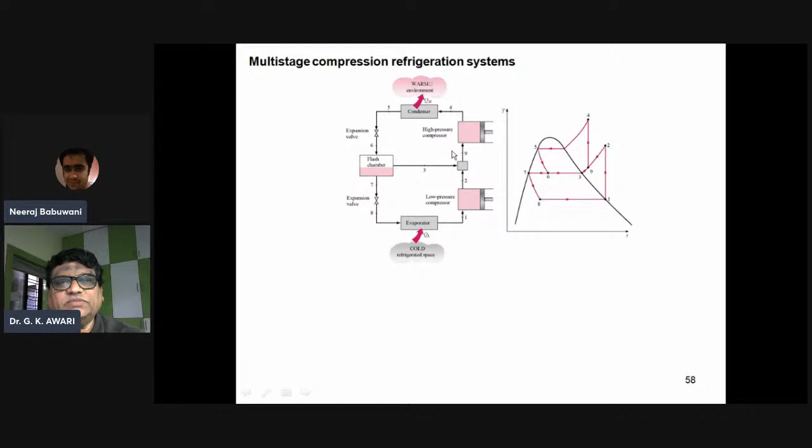Then the multi-stage compression refrigeration system: evaporator, expansion valve, flash chamber, expansion valve, condenser. You can see the high pressure compressor here. This is a two-stage, multi-stage vapor compression system. So what happens in multi-stage is: low pressure evaporator, expansion valve, two expansion valves, flash chamber, high pressure compressor, and condenser.

Multi-purpose refrigeration system: a refrigerator with a single compressor can provide refrigeration at several temperatures by throttling the refrigerant in different stages. The expansion valve leads to the kitchen air, which becomes high temperature air because high temperature is present, and in the condenser, the refrigerant loses heat and delivers it to the high temperature zone. This is the refrigerator, and the freezer is there, which is called the multi-purpose refrigeration system. So a refrigerator with a single compressor can provide refrigeration at several levels by throttling the refrigerant in two stages.

Like in our home also, we have this type of system where an additional refrigerator space is provided, where the cold temperature can be achieved.

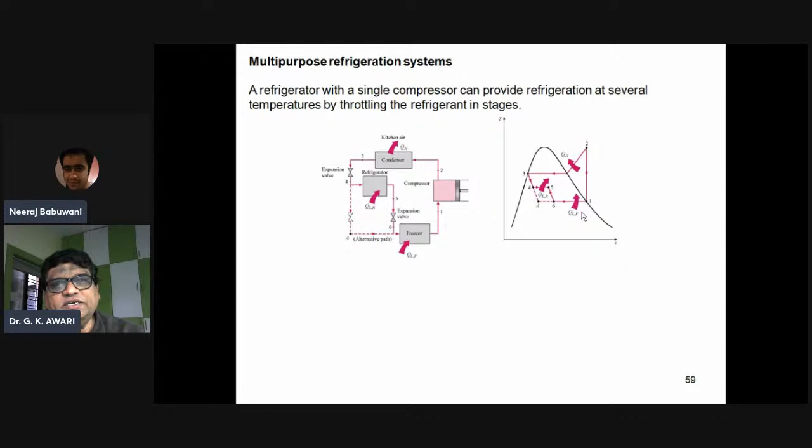So gas refrigeration system, absorption refrigeration system. Only a few parts are remaining, which I will continue.

Then, power cycles can be used as a refrigeration cycle by simply reversing them. Of these, the reverse Brayton cycle, also known as the gas refrigeration cycle, is used to cool aircraft and to obtain very low cryogenic temperature after it is modified with regeneration. The work output of the turbine can be used.

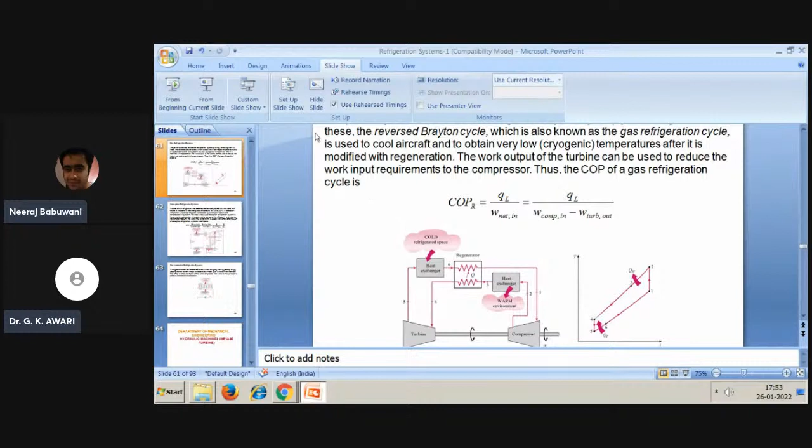So power cycles can be used as a refrigeration cycle by simply reversing them. The reverse Brayton cycle, known as the gas refrigeration cycle, is used to cool aircraft and to obtain very low cryogenic temperatures after it is modified with regeneration. The work output of the turbine can be used to reduce the work input requirements to the compressor. Thus, COP of a gas refrigeration cycle is given by QL divided by W net in, which is equal to QL divided by work of compression minus work of turbine out.

So here you can see the gas refrigeration system: the turbine, compressor, heat exchanger. This part is nothing but the refrigerator.

Then absorption refrigeration system: another form of refrigeration that becomes economically attractive when there is a source of inexpensive heat energy at a temperature of 100 to 200 degrees centigrade. In absorption refrigeration, the refrigerant is absorbed by a transport medium and compressed in liquid form. The most widely used absorption refrigeration system is the ammonia-water system, where ammonia serves as the refrigerant and water as the transport medium. The work input to the pump is usually very small, and the COP of the absorption refrigeration system is defined as desired output divided by required input, that is, cooling effect divided by work input.